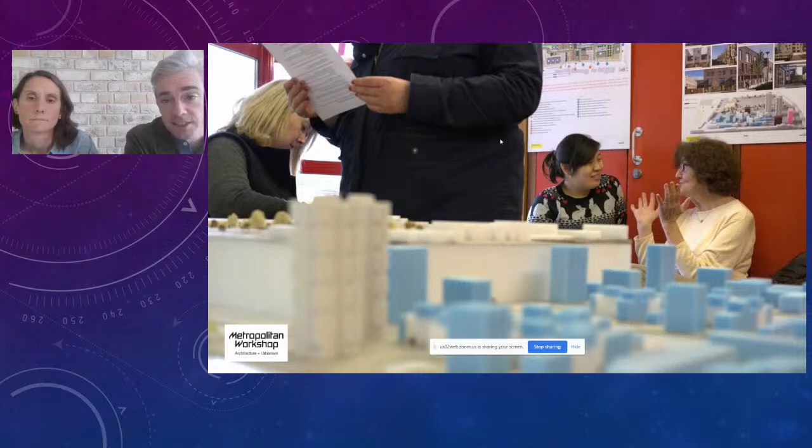The work on this project started in a fairly traditional fashion where options were drawn up and presented back to the residents. Now, this was going on against a more general backdrop of scepticism to estate regeneration, particularly in London, and feelings that residents were being left out of the decision-making process. So with the residents of the Westbury estate, we developed a different approach. The first step here was to demystify the process.

What we collectively decided to do was to run a series of training workshops to build skills within the residents so that they could participate in the ongoing design process of the estate, such as issues such as density, parking, landscape, open space, height, scale, designing for safety. The point of the training was to empower the residents to contribute positively to the design exercises which took place.

In parallel, the residents also asked for an independent design advisor who sat outside of the design team who could advise them and be an impartial voice for them through the regeneration project. Through her, the residents drew up a draft residents' design brief for the estate.

Of course, we also had a client, Lambeth Borough Council, and their brief had to be delivered on as well. However, as the residents became more informed about the process, we were finding that the two briefs were showing more and more overlap. And where there wasn't overlap, it wasn't necessarily that things were at odds with each other. It was more a case that the residents were picking up on items that Lambeth's brief probably wasn't.

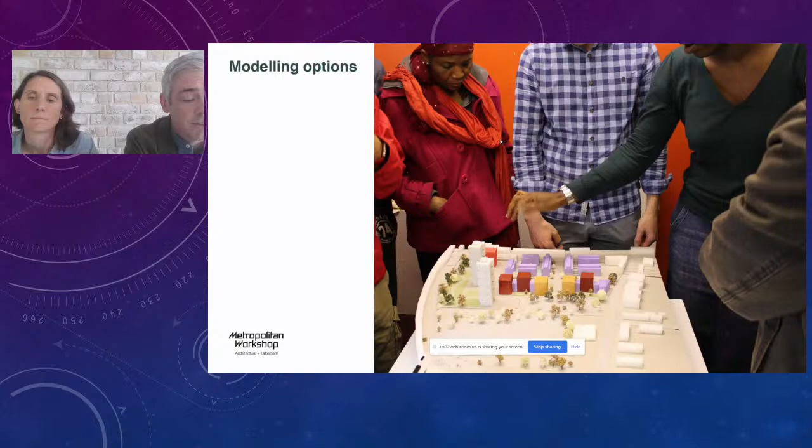As the combined briefs became clearer, the optioneering process began to pick up momentum, and we would work often with models because we find that non-professionals can respond much better to them. Also during this period, there's a noticeable change where the level of discussion moved from being one of hesitancy to one of enthusiasm as we began to shape the estate together.

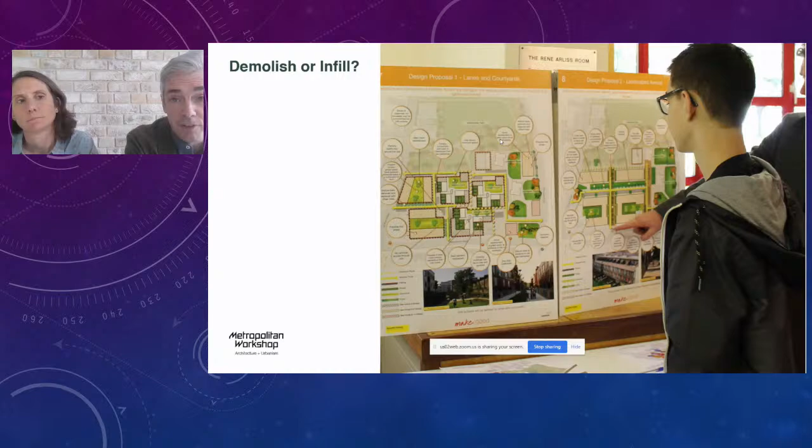These sessions culminated in an exhibition which looked at 3 different options, all of which were assessed against the residents' own brief and Lambeth's brief. There was an infill option, a wholesale demolition and rebuild option, and the option which was ultimately voted for by the residents, which was a hybrid of some demolition and some infill.

Now, we're just going to skip forward now because this project has gone through planning, but I just want to show how some of the residents' brief was picked up on.

For example, the residents liked the fact that their estate had quite loose definition between what was public and private space. So some of the building designs took this into account, where we had to find a balance between openness and security. Or they wanted to make new strong connections to the park, which was located to the south of the estate, so strong visual links were created.

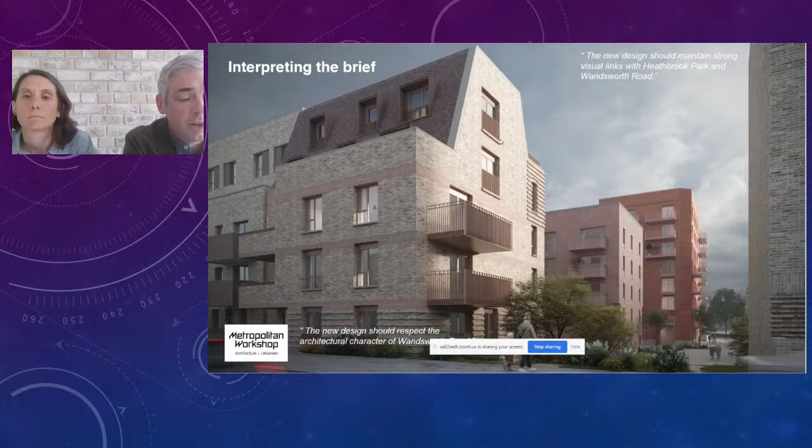Or that the design of some of the buildings should reflect the character of the Wandsworth Road. Or that the layout should maximise the number of new homes that have their front doors onto the street. Or that all shared entrances should have a welcoming feel. They are entrances, after all, to people's homes, and people thought they should be celebrated.

Working with the residents of the Westbury estate has been a hugely fulfilling process, and we've witnessed the residents transition from outright cynicism to becoming advocates for and having agency in the regeneration of their estate. Thank you.

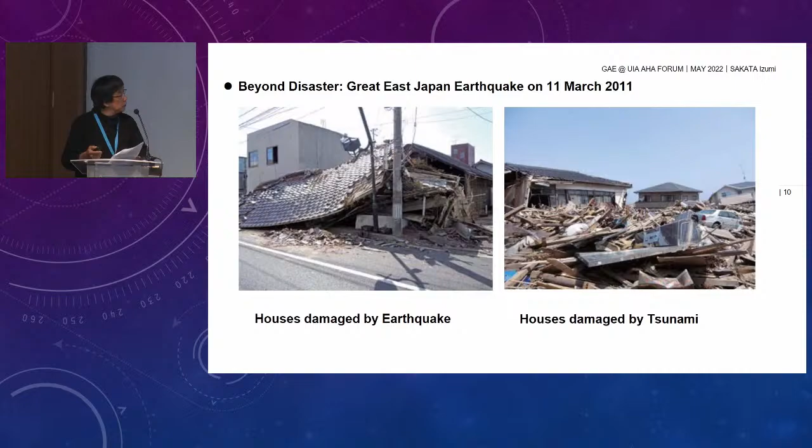Because Fukushima had to build revitalization houses for the refugees as fast as possible, they used an existing prototype public housing model, approved in a design proposal in 1998, and speedily completed the design of prototype B for their revitalization public housing model in 2015. One point about the structure method used in prototype A and B is TWFS, thick wall and floor structure, a plain and simple structure adaptable to changes of needs and planning in the process of revitalization.

Section 3, Future towards Africa. Prototype A and B in Fukushima are now being transformed into prototype C for an affordable housing model in Kenya by a project team including me. Prototype C has a unique design system called the Facility Separated Housing System, which consists of 3 units: a living unit for ordinary rooms, a housing facility unit for toilet, shower, kitchen, gas, solar, etc., and a control unit for controlling the housing facility unit.

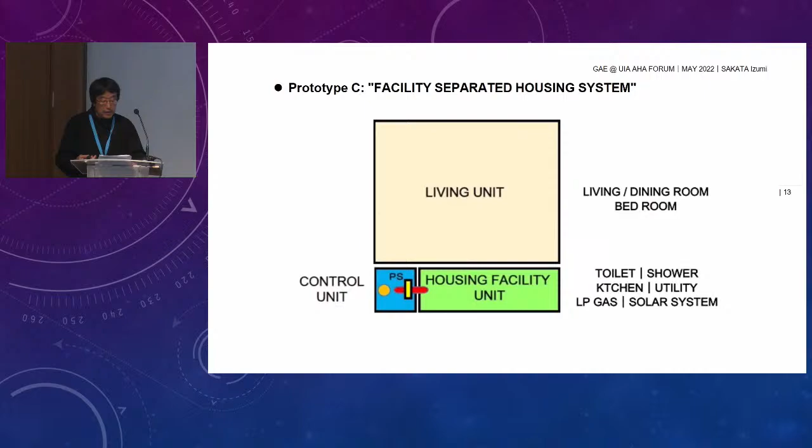The housing facility unit is prefabricated with plumbing works and not included in the initial construction cost, but is subscribed to by the owner through a regular small rental charge to reduce the initial cost. It can also be remote controlled by an IoT system.

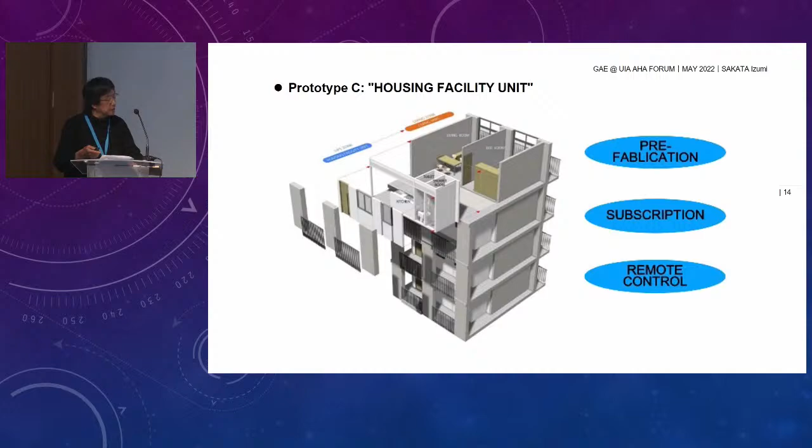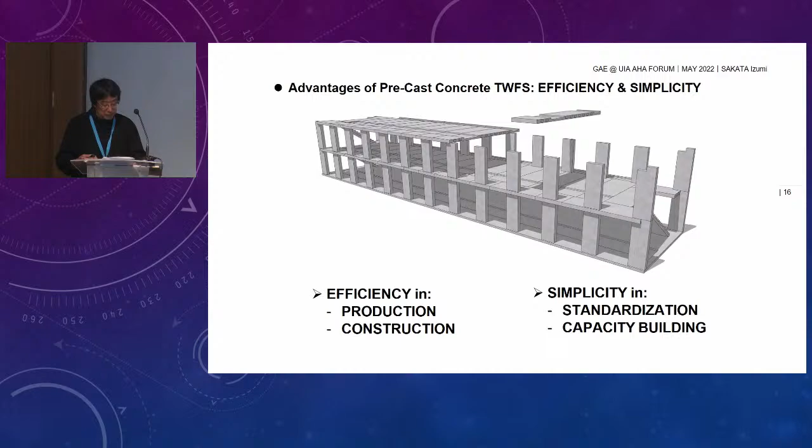As for the structure method in prototype C, TWFS has succeeded from the Fukushima model and is to be done with precast concrete. Precast concrete TWFS has advantages in efficiency and simplicity, which will benefit mass supply and capacity building in affordable housing in developing countries. In the precast concrete TWFS, the mechanical joint system of each member is crucial, so structural experimentation with a life-size model has been executed by the team.

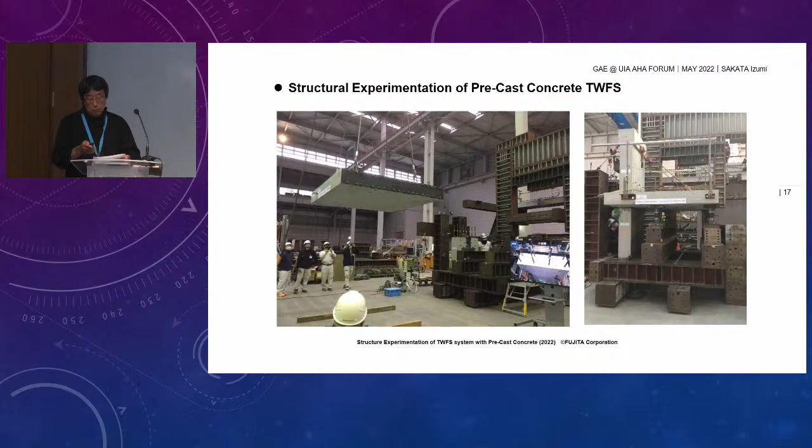We've already done a standard design of an apartment with the precast concrete TWFS system. As our partner, we've been collaborating with Jomo Kenyatta University of Agriculture and Technology in Kenya, where I used to be a lecturer and still have a very good sense of mutual trust with each other.

As my conclusion, this is the last—sorry. Oh my God. Oh, okay, actually I have a conclusion slide.

As my conclusion: first, we've been developing our affordable housing model in Kenya from the Fukushima model. Second, we believe the same prototype model in Kenya can contribute to revitalization housing after disasters all over the world, not only natural disasters but also man-made disasters like wars. Thank you for listening.

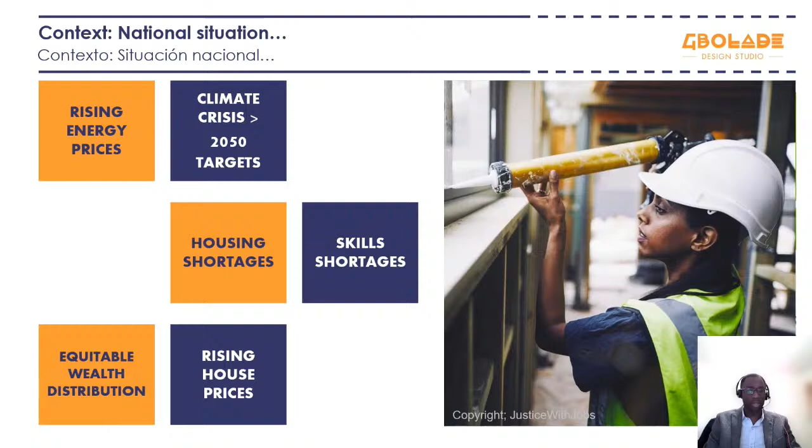I'm Lanre Gbolade, a chartered architect and co-founder of Gbolade Design Studio, a sustainability and design-led practice based out of Waterloo in London. The UK is facing huge socio-economic as well as environmental challenges, including rising energy bills and energy security. We've got challenges around affordable housing provision. The construction industry is lacking in labour by way of numbers, as well as skills to increase productivity levels. And we've got the levelling up agenda, which is looking to redistribute wealth more equitably across the country. And we've got ageing populations who are tackling also obviously with the challenges of fuel poverty. And as a country, we are looking to recover from COVID in terms of economic prosperity.

To address the energy efficiency imperative, we need to look at the 29 million existing homes in the UK. 26 million of these need some form of retrofit, and 19 million of these homes are on the bottom rungs of the energy performance rankings with a rating of D or below. 1 in every 6 tonnes of carbon emitted from the UK comes from existing housing. And over 10% of our housing stock was built very quickly and poorly insulated between the two world wars, known as interwar housing. These homes could be attracting £2,000 per annum by way of heating and gas bills if they're not addressed.

From a national perspective, it appears that the government has really kind of missed the significance of the energy efficiency imperative by failing to provide effective policy and funding mechanisms that will really address these issues at scale. So the recent energy security and heat and building strategies have really missed the importance of the imperative, with some of the measures that are being proposed being quite short and small scale rather than being large and sustained and long term.

It appears that the current focus for the government is largely on addressing building regulations, which has been a key focus over the last couple of years. It's also been focusing on new build housing and promoting that widely across the UK. And we've also got a situation whereby new sustainable power has been very much a focus as well in terms of rapidly decarbonising the UK's power sector with new technology supported by policy, therefore making carbon reductions relatively cheap and technically straightforward, and promoting things like wind power, for example, which is now the cheapest form of electricity generation in the UK and provides 1/6 of power, up from 2% in less than a decade.

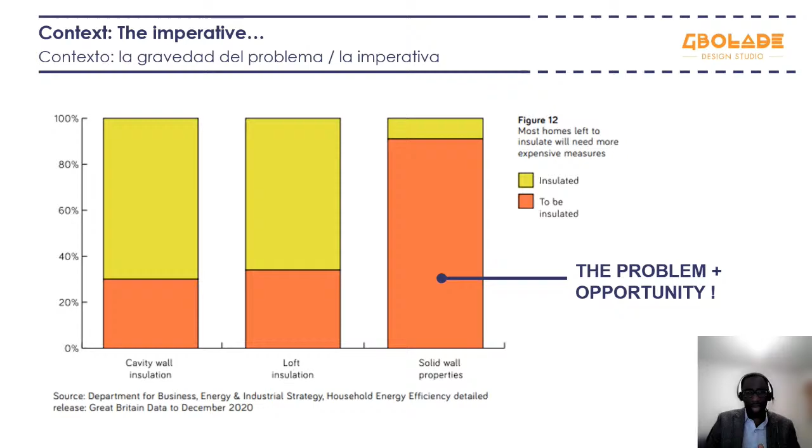And here is, I guess, the big opportunity. So as you can see on this diagram on the right hand side, solid wall properties are still very much prevalent within the UK, and largely, up to 90%, 95% of these houses are still uninsulated. So this is obviously a huge problem, but equally a very large opportunity.

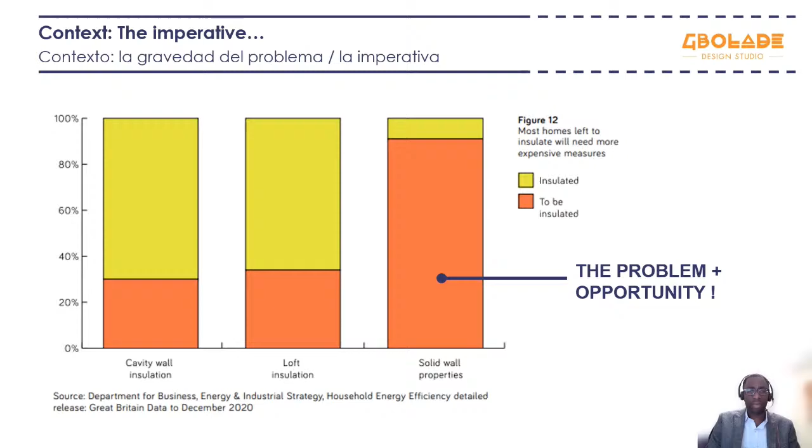The UK's housing stock is quite poor. They're drafty, they're cold, they can be damp with condensation and mold building up. And the UK residents are now beginning to kind of take to the streets in terms of protesting and looking at ways in which they can force the government to really take action.

So in terms of examples, there are quite a number of case studies around the UK in relation to retrofit exemplar case studies. However, what we're finding is that many of these are quite small scale. We have limited supply chains that are capable of delivering large scale, high quality retrofit programs.

There's no overarching government strategy at the moment that really ties together all the various grants, programs, and training skills programs. So increasingly we're seeing reduced incentives for adoption at scale.

From a supply side perspective, we're seeing a lot of support from government for wind power, solar power, and hydrogen being heavily invested in and promoted. We're also seeing the promotion of heat pumps, continued support for solar, as well as external wall insulation systems. So from a supply side perspective, we're very well supported.

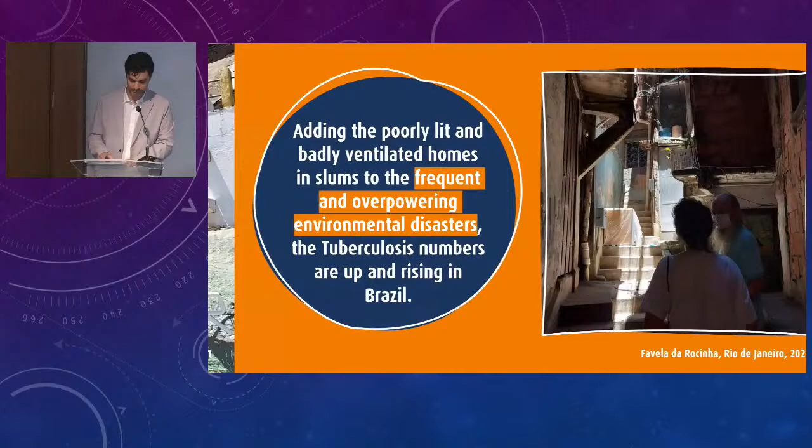These places still suffer from other diseases that have had treatment protocols for a long time, such as tuberculosis. The number of tuberculosis cases in Brazilian favelas is huge and growing. In addition, we can include the climate crisis and its disasters, such as floods, droughts, land collapses, and wildfires, which worsen the picture. Most of these tragedies happen in poor areas in Brazil, and they're becoming more frequent and more severe.

We're faced with the fact that 85% of the population in Brazil doesn't have access to technical assistance of architects or engineers. This data is a strong alert for us as the council that regulates the profession in Brazil. We must do something to meet the population's needs and redistribute the architects' workforce to a field that has few professionals and a huge demand. This is a social responsibility of our profession.

Our goal, together with our fellows from other entities in Brazil, such as the Institute of Architects of Brazil and the National Federation of Architects, is to promote the widest possible access to architecture and urbanism in our society. In Brazil, we have a law called ATHIS, which states that every poor family has the right to be assisted by an architect or an engineer. Unfortunately, this law still hasn't changed our professional standards, especially because of the lack of political decisions on prioritizing housing policies. For that reason, we are working to spread the information both to the population and to public authorities.

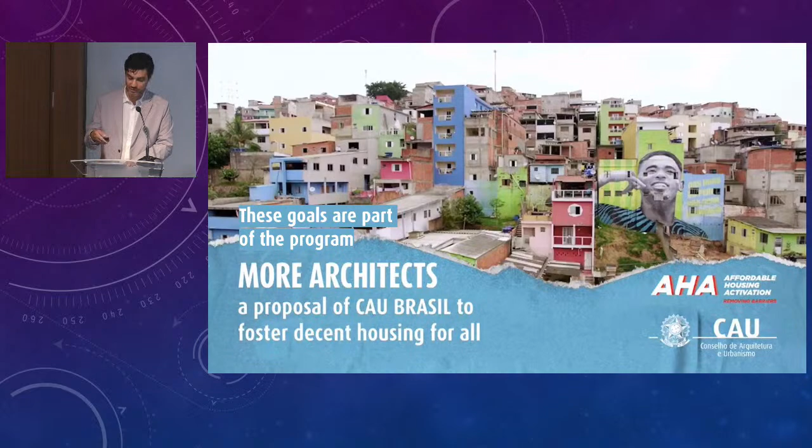In the Council, we have been talking with more effort about this law since 2015, but architects and social organized movements have been talking about it for a longer period. They created this law, ATHIS, and contributed to the Constitutional Article 182, an important milestone for urban legislation in Brazil. It's about the right to the city.

We are also trying new ways of communication by reaching the population on the platforms they're using. Social media in Brazil is huge, and everyone is searching for information there. So we're holding online events with influencers related to the low-income population to talk to them directly about their rights and the importance of healthy and safe spaces.

We do believe that these actions, along with the virtuous legislation and practice legacy in Brazil, can transform our cities and change the paradigm of our profession. It's a long journey, but we have already started. And that's all. I hope I didn't go too long for the 6 minutes.

Thank you, Antonio. A fascinating insight into the design of legislation and law to liberate impoverished communities and give them architecture. Our next speakers are Hideki Iwahara and Ako Nagao, architects from Japan. They established their office in 2020 and look to expand the definition of the environment and explore new possibilities for architecture. Their project, the Public Reconstruction Housing in Nakamichi to Yabuki, has received many awards. They will now talk on the screen.

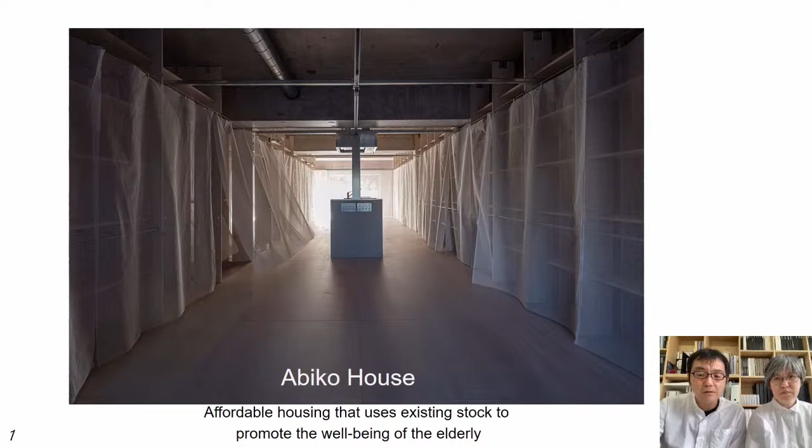The site is in the suburbs of Tokyo. It is a housing complex that was developed by a private developer in the 1970s. It has about 1,000 units and includes a store, a city hall annex, and a meeting hall. There is a community of mainly senior citizens.

The former unit was a typical 3-bedroom plan. It features advanced technology for the time, including a stairwell-type plan allowing apertures on two sides, a structure with no interior load-bearing walls, and radiant heating panels as standard equipment.

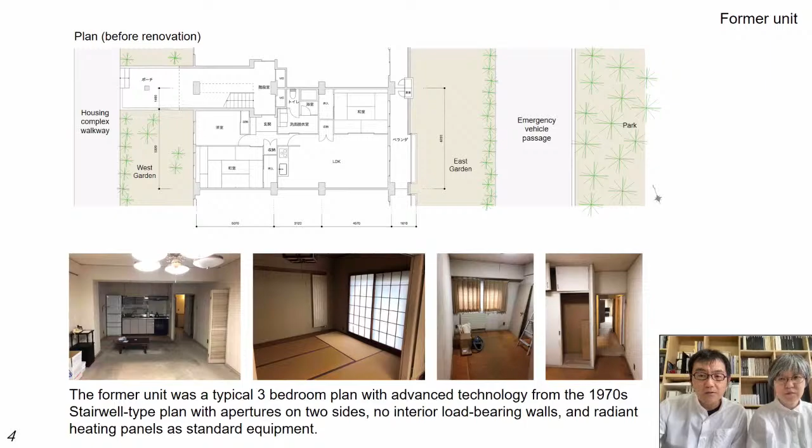The open one-room plan after renovation removes all existing partition walls to create a single open space. The large room was then divided into several areas of different sizes and orientations.

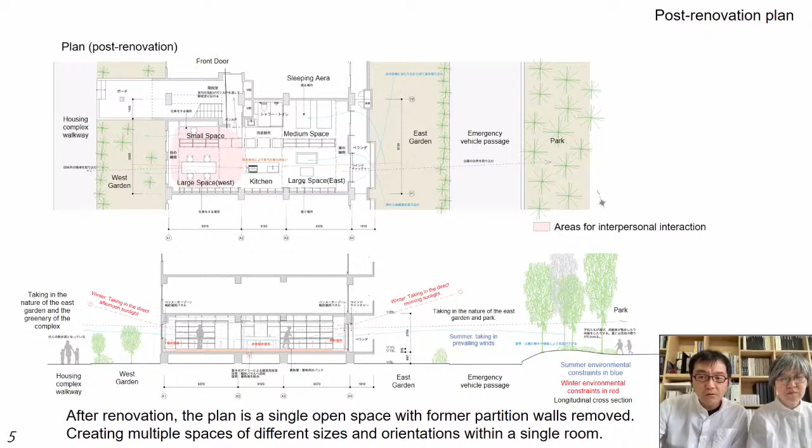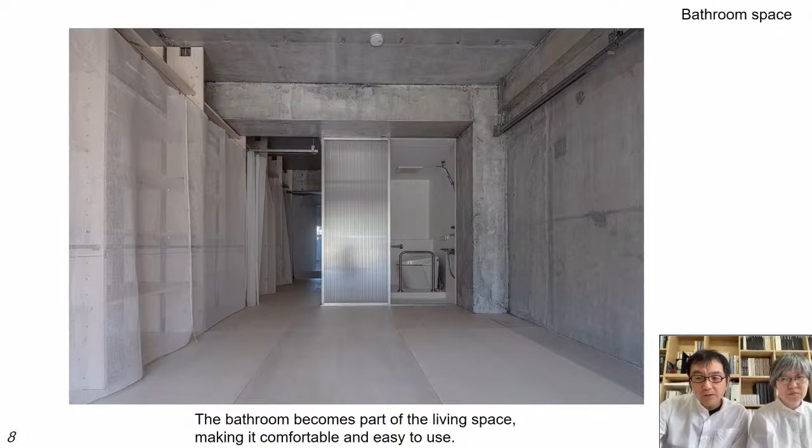By softly partitioning a large space, we can create distinct areas while allowing occupants to feel each other's presence. The toilet and shower area are partitioned simply with translucent fitting.

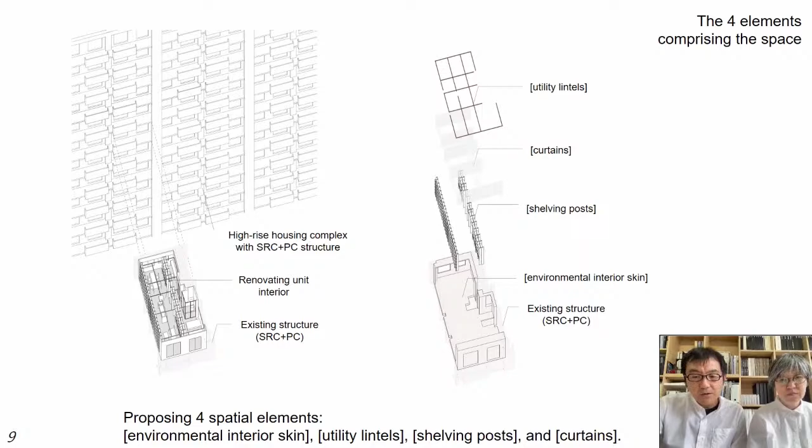By integrating it into the living space, the bathroom becomes a more comfortable and usable place. This plan is designed to resolve the physical and social barriers faced by the elderly while taking advantage of the features of the existing apartment. To achieve this, we compose the space with 4 architectural elements: environmental interior skin, utility lintels, shelving posts, and curtains.

The environmental interior skin is the 3 layers existing inside the building: the frame, insulation, heat storage, and finish. This mechanism creates an indoor climate that works gently with the elderly, with weakening bodies and dwindling senses. Insulation layers are applied to the thermal weak points in the frame to protect the interior.

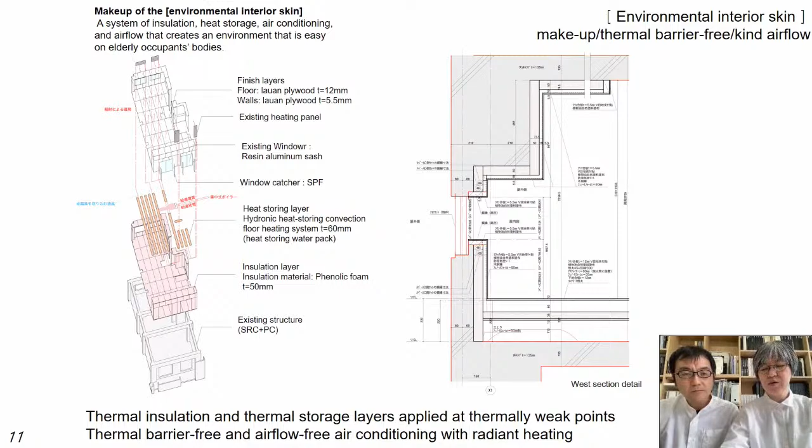The radiant heating created through the combination of existing heating panels and the new thermal storage layer on the floor provides a thermal barrier-free and gentle air conditioning without airflow. The heat insulation and thermal storage layer is covered and visualized by a finishing layer of lauan plywood. A newly installed wind catcher directs gentle natural breeze into the room to keep it cool.

The utility lintels, shelving posts, and curtains are devices that create a variety of spaces to accommodate the changing lifestyles of the elderly. The utility lintels are the grid of wiring ducts suspended from the ceiling, allowing for the free installation of lighting fixtures and electrical outlets according to how the space is used.

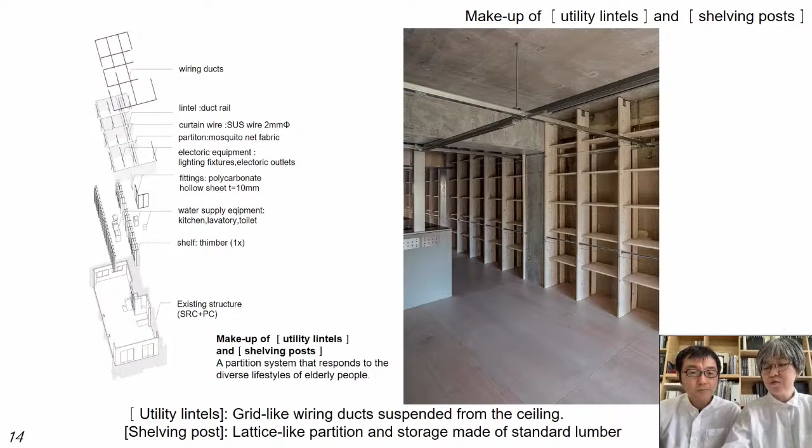The shelving posts are lattice-shaped partitions and storage spaces, allowing the user to freely divide a single-room space. The curtain is a partition of mosquito net fabric suspended from wires, creating an ambiguous boundary. It creates a space that balances unity and diversity.

The 4 elements are categorized according to their renewal period. The environment interior skin and utility lintels are the elements that need to be renewed by a specialist every few decades. The shelving posts and curtains can be updated by the user every few years.

Materials for the parts that the user can update are industrial products already available at hardware stores, and can be assembled and disassembled without special techniques. This is a system that allows users themselves to enjoy participating in the making and updating of their living space.

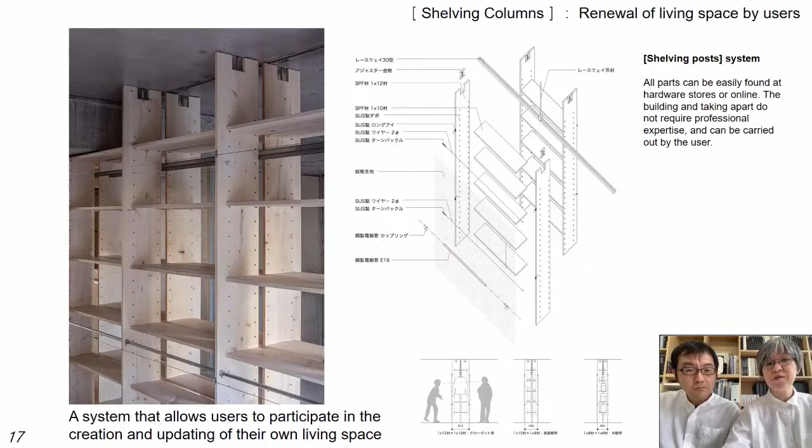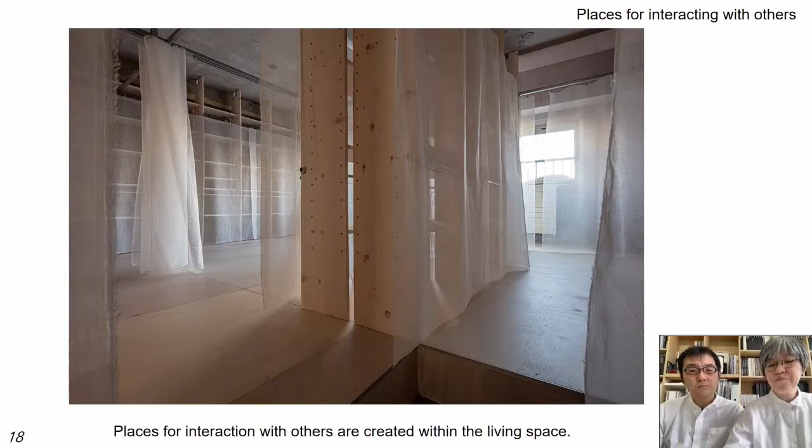The open space configuration, gentle indoor climate system for creating diverse places, and mechanism for participatory space making let occupants freely create places for mingling with others. Hobby space, workspace, or caregiver space can be placed close to the front door. This facilitates interaction with others, from a quick chat to social support with change.

As a result of our aim to promote the well-being of the elderly, we have created a blank space that encourages residents to create their own lives. We believe that in the coming society of diversifying lifestyles and super aging, there is potential in this kind of weak architecture that takes form only when occupants actively get involved. This is the end of our presentation.

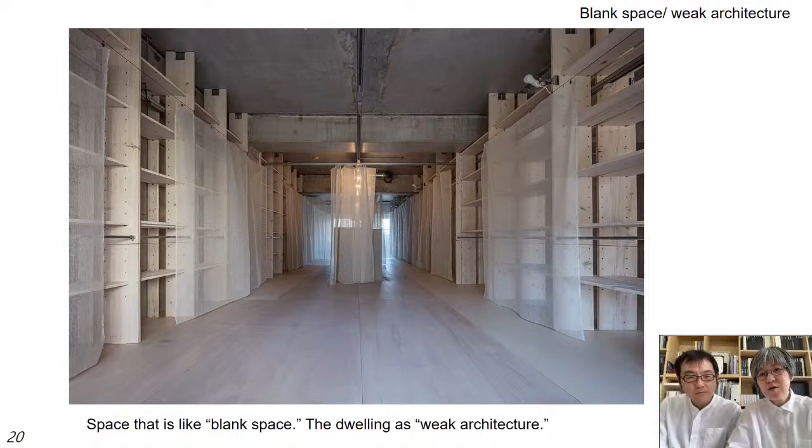Thank you to Hideki and Akko, talking about a kind of long life, loose fit idea of retrofit and soft architecture. It didn't look weak to me, but it looked soft.

We're now going to travel to New Zealand to watch the presentation from our next two speakers.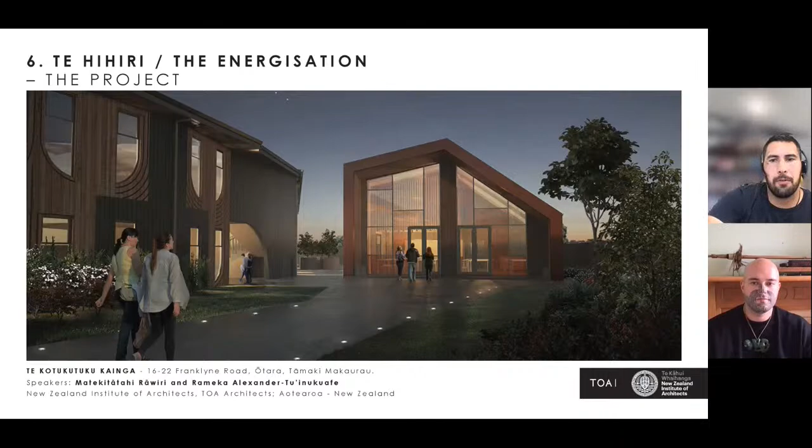Kōtukutuku has dynamic forms drawn from Tāmaki Makaurau pūrākau, or narratives, paying homage to the great ancestor Tara Mainuku, of which the place Otara is named. We have shown our original narrative sketch, which conceptualizes the story into a diagram that is then translated into architecture.

The conceptual narrative reflects the proverb, do not turn your head until you pass the safety net of Tara, which references a treacherous sandbar in the Manukau harbour. It wasn't until you passed the sandbar that you were able to reach safety. Te Kōtukutuku nurtures its residents and enables them to heal in a safe environment.

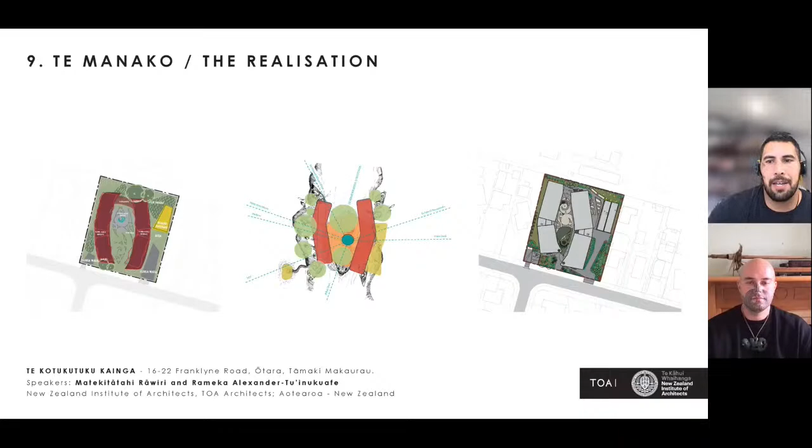This project challenges and brings a new perspective to the notion of medium density living, with two waka, the two canoe forms, housing the whānau, a central courtyard holding the safety net of Tara, and the residents living together within an environment that places their well-being and care at the heart of their kāinga, their home.

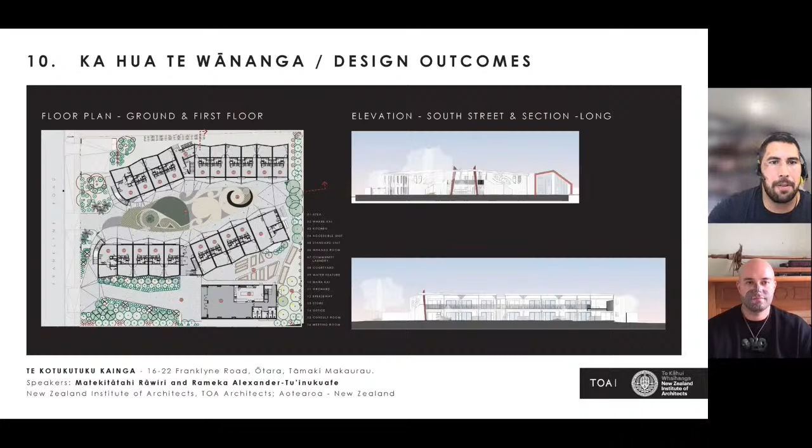The whare manaki anchors and steadies the double-hull waka, allowing everyone to work and gather together for events. The building stands seamlessly in the landscape with dynamic forms and shapes which speak to the movement of waka on the ocean. So you see the two double-hull waka around the courtyard with the whare manaki anchoring at the bottom.

The residents who live here, tangata whaiora, previously may have been living in unhealthy and sometimes unsafe environments, whereby now the quality of life has been improved through living in a supportive and understanding community. Here you see an image of one of those beautiful people that live in this facility.

Mental health and other support services are brought directly to the residents without them having to go out to hospitals or medical clinics, which is hard if you don't have money for those services or even a car or access to a car. Support is provided on site by the trust, with the whare manaki, the communal building, being the home for these services.

The dynamic forms of the building reinforce the values of the narratives we have spoken about, of the harbour providing a safety and a nurturing place. Additionally, these narratives, through whakairo, Māori design elements have been sandblasted into the timber of the facade, and you also see that in the structural members that hold up the roof.

Our Indigenous design process has been drawn from whakapapa of the whenua, the many layers of Māori occupation within the surrounding landscape of Tāmaki Makaurau. We are guided by our ancestors and have a responsibility as Māori architects to provide guidance and be intentional in how we design for our communities now and into the future.

Te Kōtukutuku Kāinga has intentionally used a number of sustainable design techniques, such as the use of CLT timber structure, locally sourced timber cladding, rainwater harvesting, natural ventilation, and other important features. However, one of the most important is a tangible thing such as a māra kai.

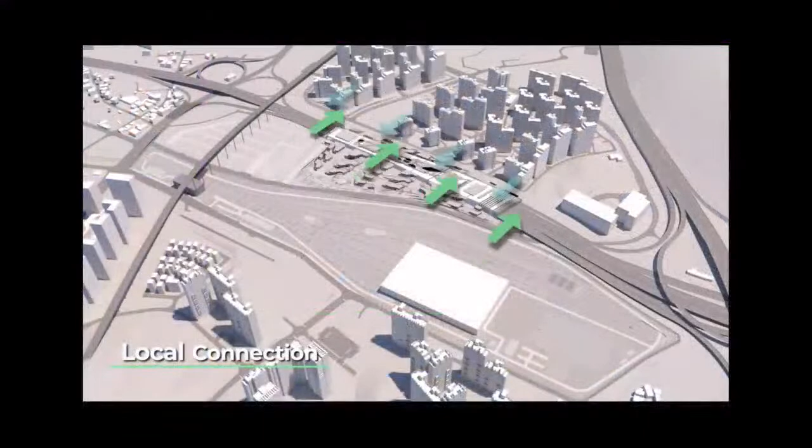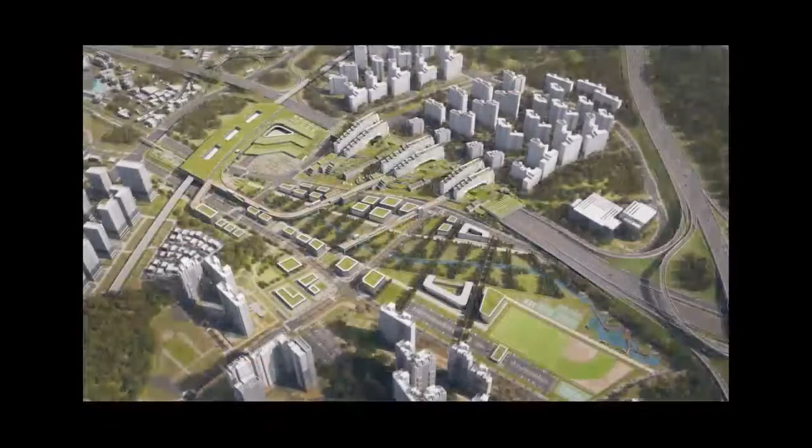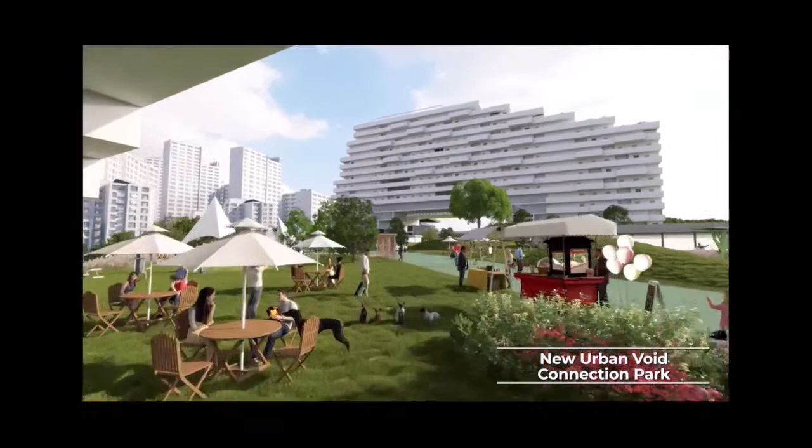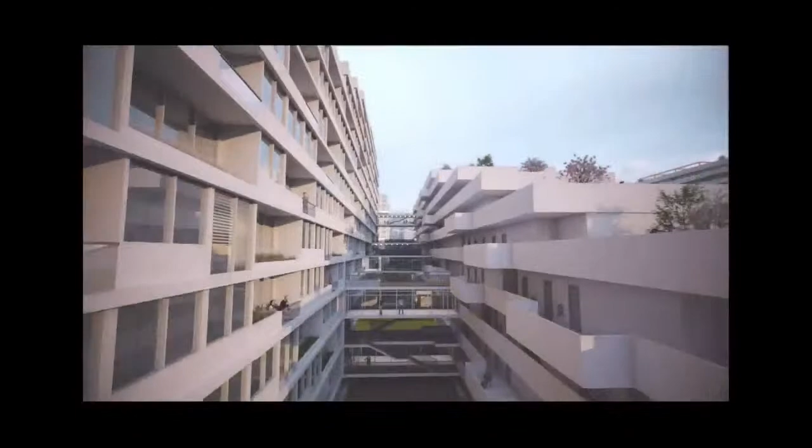Based on this background, I'll introduce why we made this project.

Now, we have the land with... this way is the highway, that is the railroad. It means between the quarters here, we have very big residences, and others too, but they have not been connected. So we did this new project: we connected the two quarters using this part of the land for new housing.

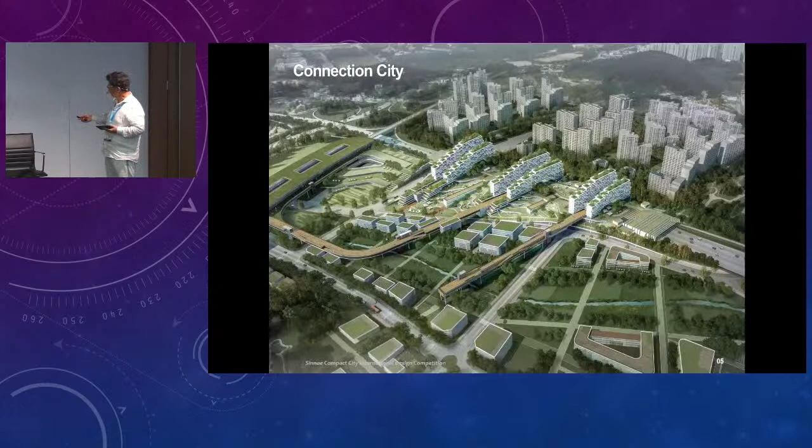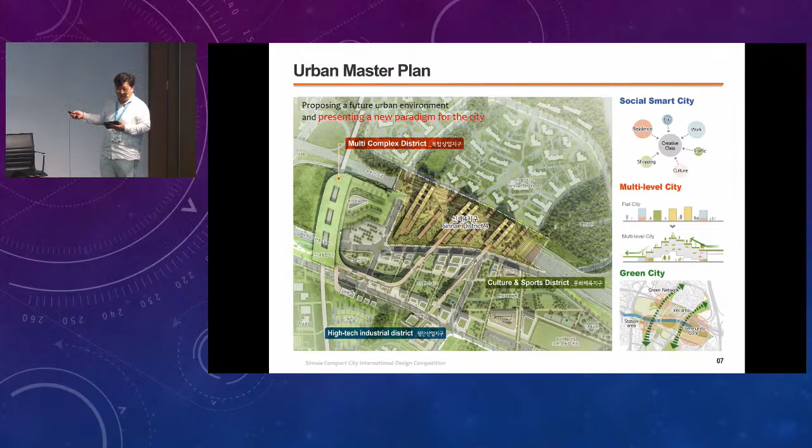Okay, this is the result. We made a social smart city, a multi-level city, and also a green city. I think the diagram is very explanatory, because you're architects, I don't need to explain. We have so many social complexes, etc.

And this is very important: we are covering the infrastructure, and we are also covering it with maximum green space, and making sky housing on the mega structure.

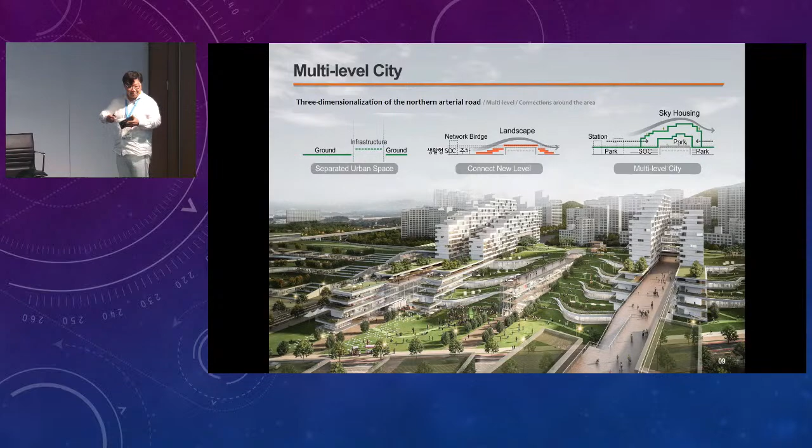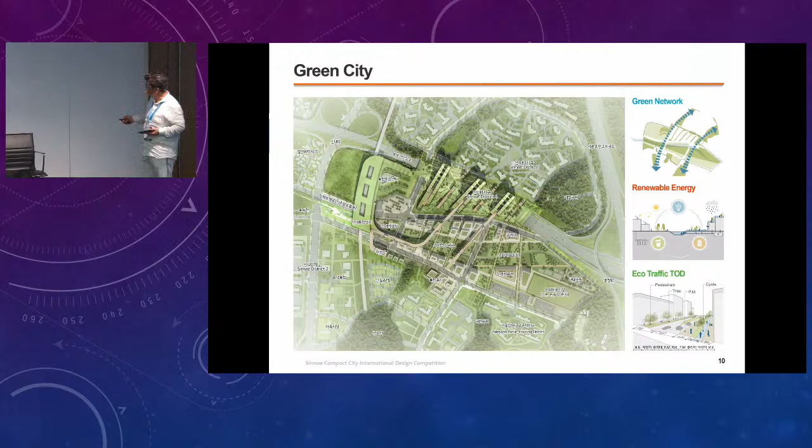Of course, always the green city and green network, and for the renewable energy and the eco traffic system. And there is a design process.

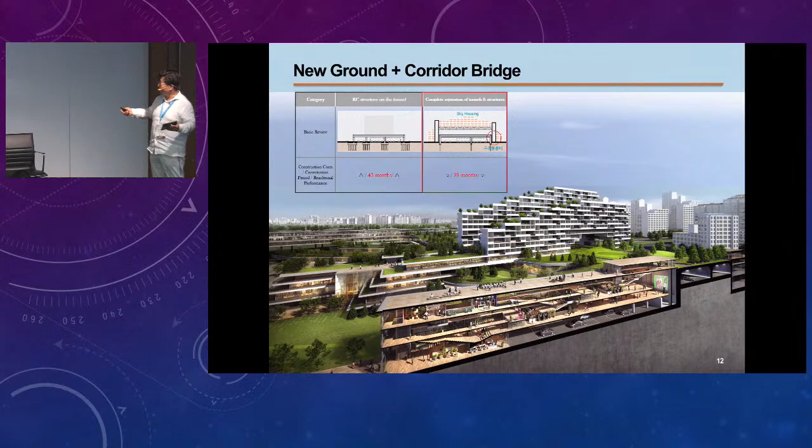And the new ground corridor - we made the new ground and the corridor bridge for the related area, and on the bridge we made the space park.

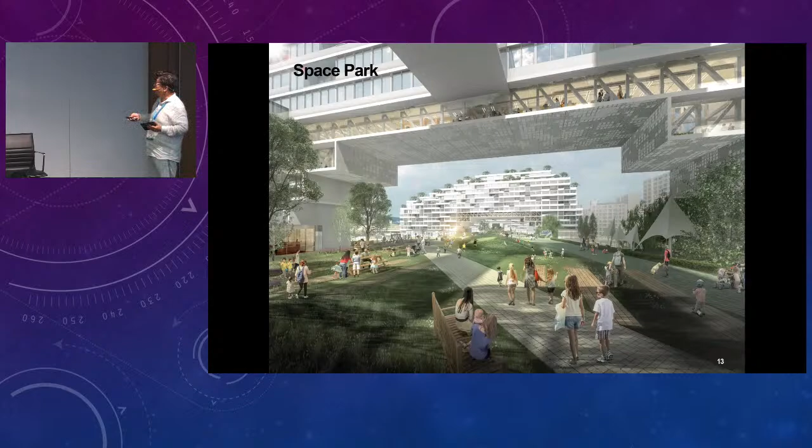And that is a social mix plan, because in Korea, social housing is between 40 square meters to 85 square meters. We cannot go over 85 square meters.

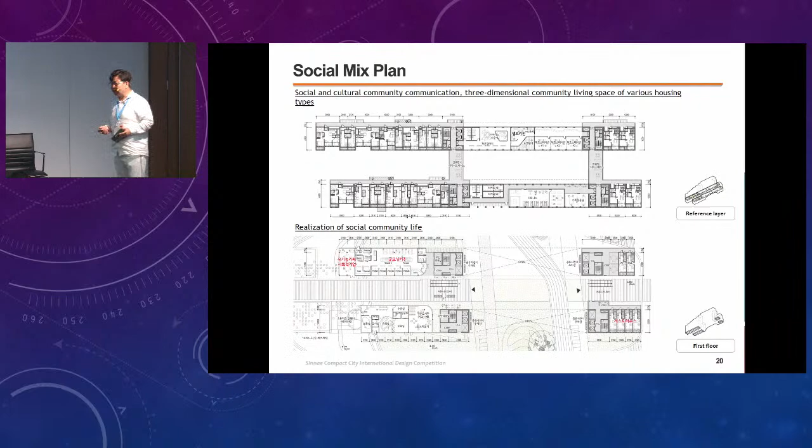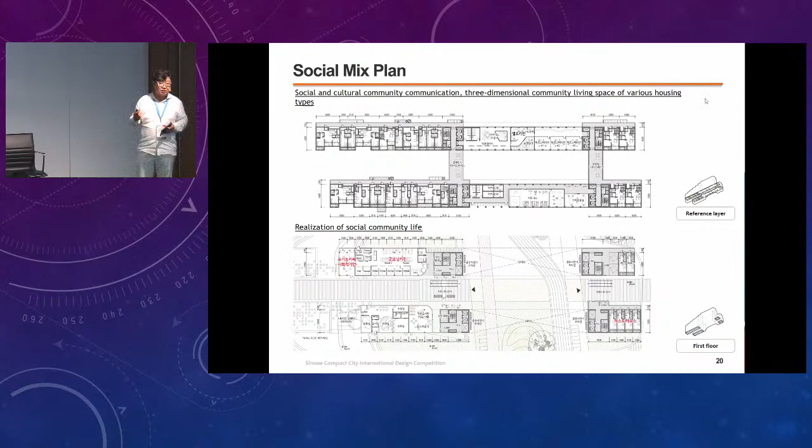I think we can explain this next. We chose something like a modular house, because we call it the flexible unit, and we have the module - a small module - and we multiply it.

This part is the sky on the bridge, so we make the modular. It's input to the prefabrication, and the other part is RC. I'm so sorry, I got very fast.

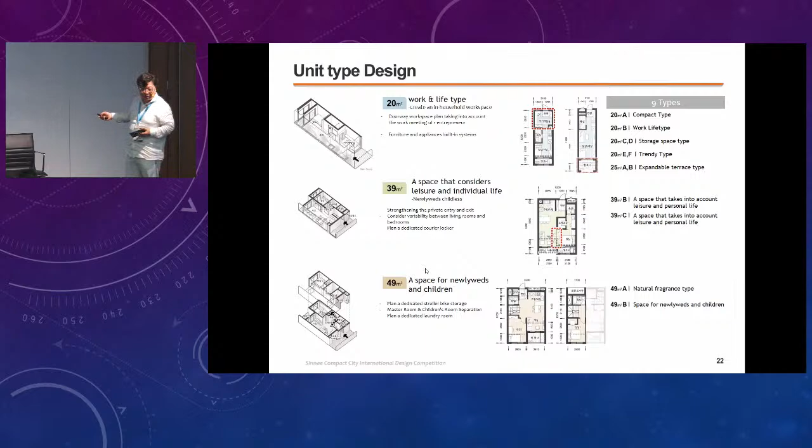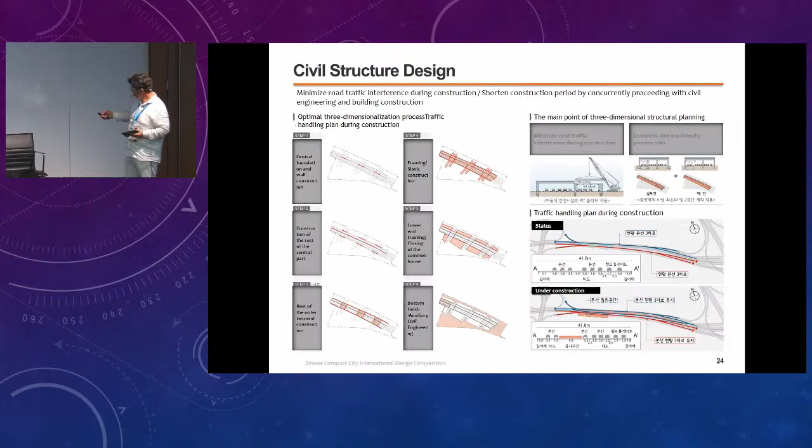We have 9 units of the modular, and the urban life scenario, and the civil structure - how we made this one. This is the structure and modular design.

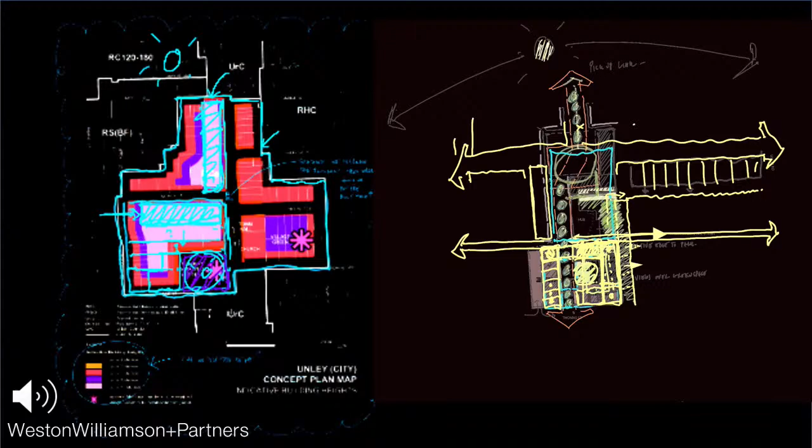The ground plane and movement paths become congested and unclear, and open space, solar access and outlook were all compromised.

In response, we reviewed the City of Unley Development Plan and the Unley Central Precinct Plan. We then overlaid the Future Transport Plan that showed proposals for light rail into the CBD along Unley Road. We recognised the potential for the precinct to grow and deliver density to the north, and the reality of that potential, with single ownership land, big box retail, and a chance to go higher without overshadowing the park. The Future Transport Plan makes the precinct connected and viable for jobs uplift.

We considered the phasing of the master plan from south to north and how the new land parcels could be formed to be both serviceable and developable. Important consideration has been given to the streets in our plan.

Our bold new north-south pedestrian connection, Unley Walk, is offset by a series of dissecting streets, each with a specific character and feel. At the heart of the scheme is the new plaza.

By resetting the site boundary, we've breathed new life into the heritage building as the centrepiece in a north-facing public square. This new civic space is hardscaped with green soft edges, so as not to echo the amenity of the existing park, and to encourage other uses as day turns to night and through changing seasons.

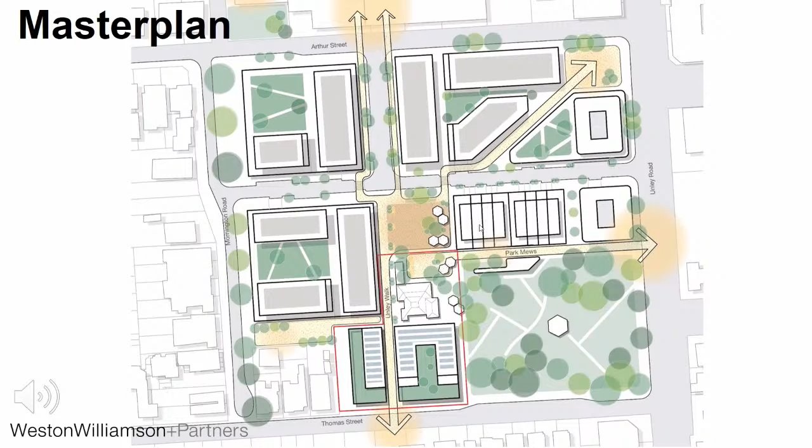A diagonal connection from the new central plaza to Unley Road provides a desire line to the future tram stop and provides adequate dwell space on the corner to meet people before heading into the city.

Townhouses bookend the podium and flexible studio retail spaces sandwich as infill. These are important spaces for the precinct as their scale makes them flexible and have the ability to evolve to suit changing market demands, providing sustained job growth into the future.

Unley Walk provides frontage and presence to the previously concealed hub. This is activated by retail and townhouse modules that are in sync with the adjacent residential scale and grain. Instead of an overdeveloped and congested site, we now have a vibrant 24/7, high-quality, well-connected community hub that the affordable homes are proudly part of.

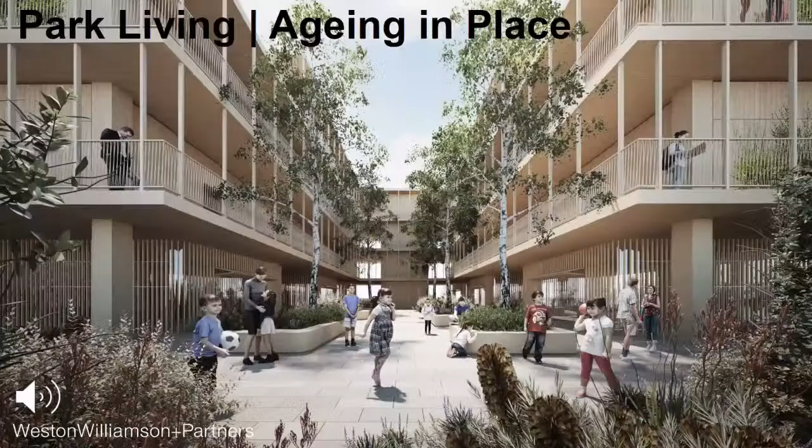Our vision for the living village is a path to strengthening our communities. Drawing on targets set out in the 30-year plan for Greater Adelaide, we set out to achieve new models of housing by designing a future adaptation as part of the Day One scheme.

Our proposal is simple: a cross-laminated timber frame structure which allows prefabricated units to slot into grids in various combinations, a modular system which can adapt its spatial needs subject to shifting demographics.

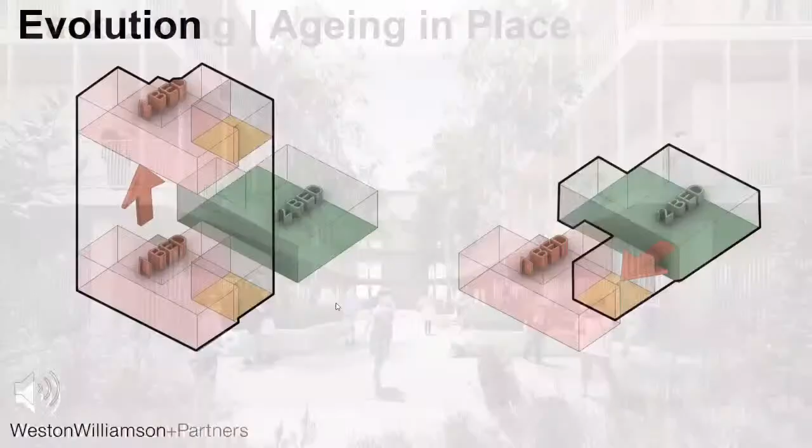This simple module not only allows for versatility at the time of lease or purchase, but enables change and adaptation through the life of the building. This grid allows for growth laterally and across levels to create lasting homes as part of an evolving living village.

The flexible housing sits above the garden podium, providing privacy while still being connected to the hub and village. Open air and covered walkways provide circulation, and these volumes are punched with openings for communal gardens and co-living spaces that allow the compact apartment units to breathe. We envision a living village to truly have a healthy and thriving life of its own.

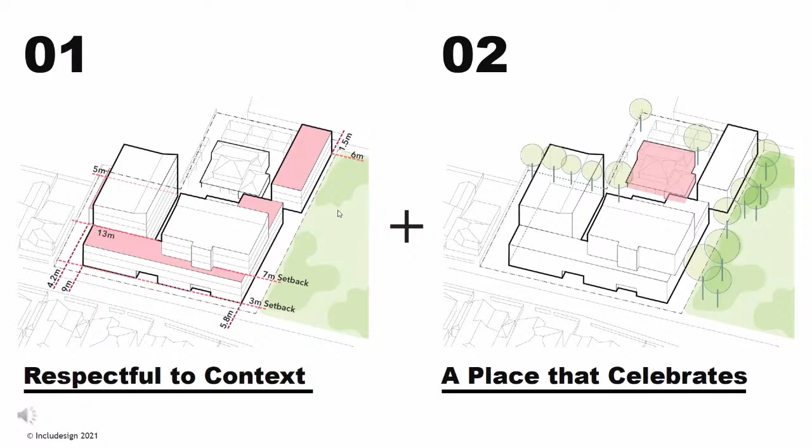The third is a place to connect. The proposal transforms the site into a network of shared spaces, supporting pedestrian flows and creating 2 new lanes.

This is also a place to share. Common spaces are strategically located to enable communities and support passive surveillance, creating opportunities to meet, gather, play, grow food, and relax.

Enabling a vibrant community by providing a diversity of spaces to meet between neighbors, family, friends, and co-workers, and by offering multiple uses at ground level, gardens, and open spaces. The next principle is creating a comfortable place to live.

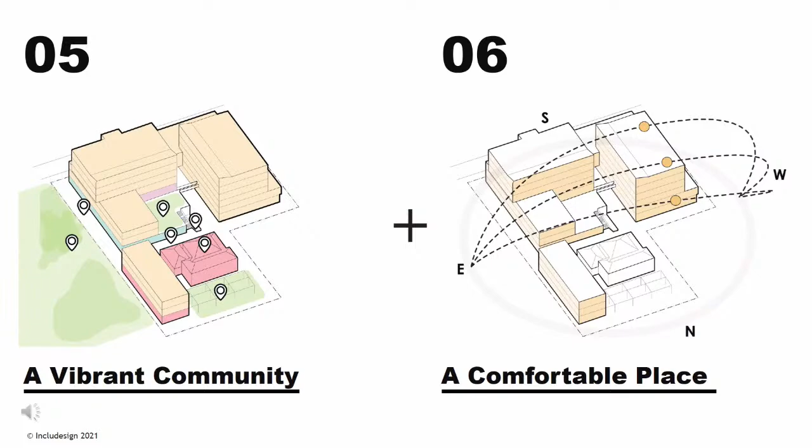The project applies a series of passive design principles to create comfortable and delightful homes - a place that cares and is mindful about the use of resources of our shared global home, integrating aspects that are intrinsic to the space, such as clean energy and urban cooling principles, and creating a platform that enables residents to choose greener options for transport, composting, fresh food gardens, and so on.

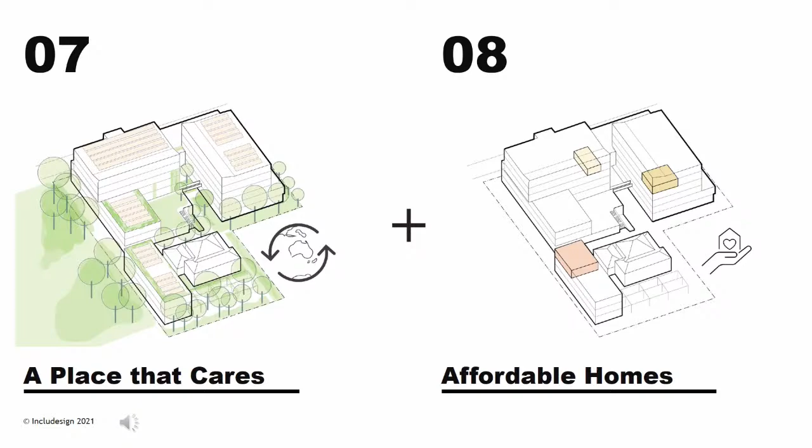Affordability is central to our scheme, so design elements and spaces are integrated to serve multiple purposes. Size is a key matter in affordability, so we propose compact, flexible, and efficient dwellings, and other cost-effective design strategies such as standardization of services, rationalized structure, and form.

The ground level design carefully integrates different activities with the residential use, the space between the buildings, the landscape, the gardens, and the connectivity that is created within and around the site.

For instance, the raised common spaces located at the first level are dedicated to the residents to foster connections while feeling less public than the lanes and gardens proposed at the ground level.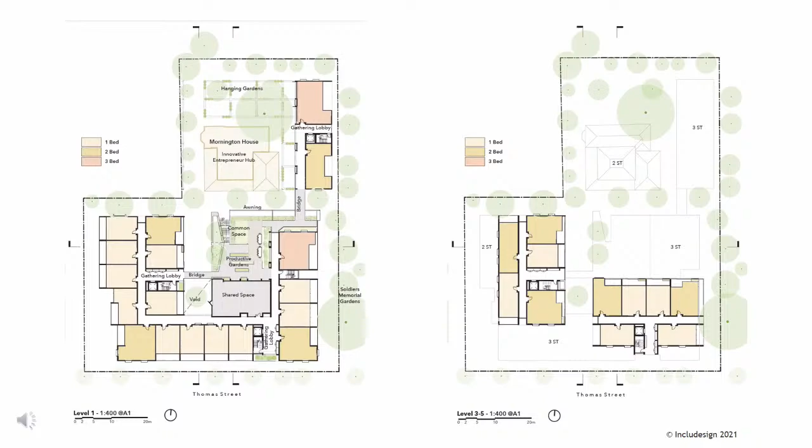10 architects, 4 continents, an hour and a half. I think that's pretty good.

There is an idea of drinks on the terrace, and also an idea of questions, but it's been a very long day. What I thought I might do is invite the panelists to the stage and ask them each to make one comment about what they've taken away from today. But would the panelists want to come to the stage? I'll just ask you each to reflect on, I mean, we meet because of this idea of exchanging ideas and mismatch. So come to the stage, take a seat, and then in turn give us your reflections on what you take away from the discourse.

And obviously we have 4 panelists online, so I'll invite you to do the same. If a question arises, we'll take it, but if not, I think there's a moment where you've got to go with the flow.

Should I start online with Marianne? Are you okay to talk a little bit about how you perceive this from the space you're in, and the connections, the differences, and also the similarities of the challenges that we saw being addressed in different ways today? I've put you on the spot.